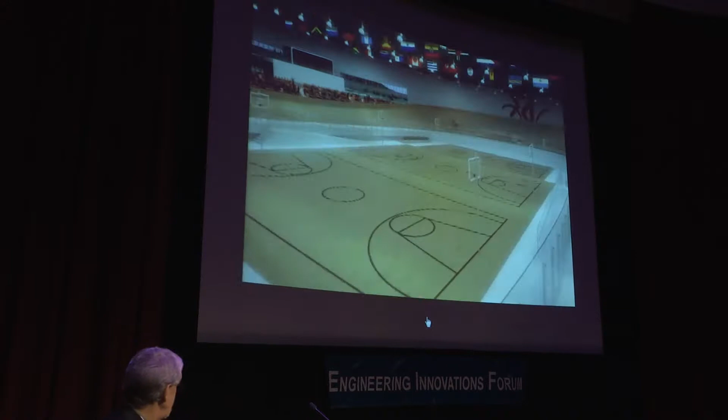We had this vision that maybe they could actually use it for BMX bike events as well. Going to the theme of making sure that the town of Milton has a venue which is truly a legacy venue that they'll be able to use for multiple sports in the future.

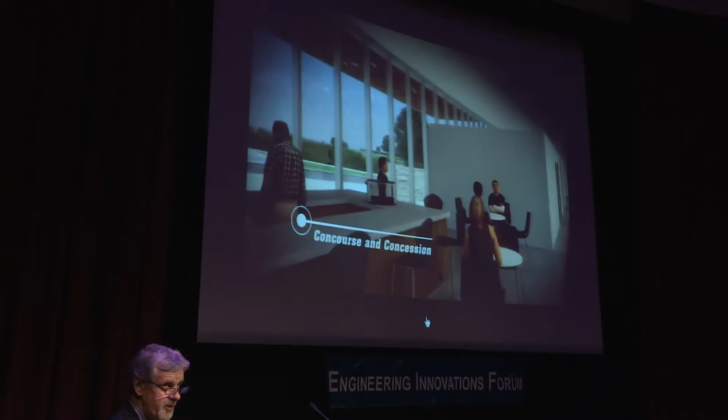The location of the velodrome is on the west side of Milton, which as Signe said, I believe is the fastest growing community in Canada, and development is coming all around this area. But the velodrome at the moment is still out in open fields, and it's got a really cool backdrop to the Niagara Escarpment.

Eventually, I believe the town intends to use this more as an educational centre, so the likes of Laurier University is planning a small campus there, along with other facilities that go more toward the educational approach.

Anyway, I'll try and stop this thing now.

So just moving on, we mentioned before the cycling community is really excited about this. Curt Harnett, most of you remember him as being an Olympic medalist.

Curt and Steve Bauer were the first to actually use this facility while we were still constructing it. We had the track completed, the rest of the building was still in construction. They came in their hard hats, and then we allowed them to run their bikes around the track, not in their hard hats, but in their cycling helmets, because we felt they'd be pretty safe. They were really excited about the fact that this facility is now available within Canada.

I think the difference between Curt and Steve is that Curt has hair, Steve has nothing.

Just some of the sponsors involved. You see the 2015 Town of Milton and Infrastructure Ontario, and others involved in the design and construction of the facility. I have to give out some credits.

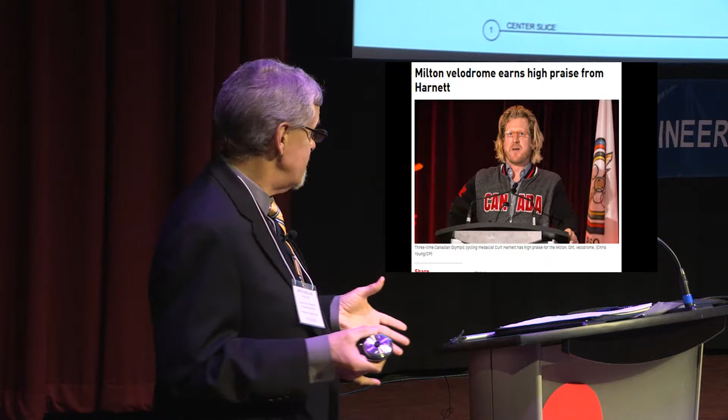So just a few things about the construction itself. You saw in Douglas's presentation some of the long spans over the Aquatic Centre. Similar to the Aquatic Centre, the Velodrome has to have clean sight lines, including for broadcast. So we had to design and construct clear span structural steel, which was obviously the preferred mechanism. These trusses varied in length because it's an oval type facility, but the maximum length was just under 90 metres, so it was a very broad span truss.

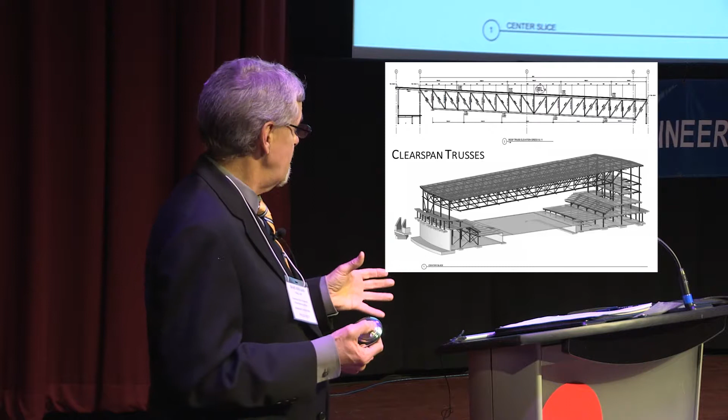The trusses are about 5 metres deep. They were fabricated in 3 sections and then bolted together on site, lifted in one lift with a couple of 100-ton crawlers. When the process of erecting the structural steel was underway, pretty much everything within the confines of the Velodrome area for construction had to be put on hold, since the structural steel took precedence over every other construction activity within the envelope of the Velodrome.

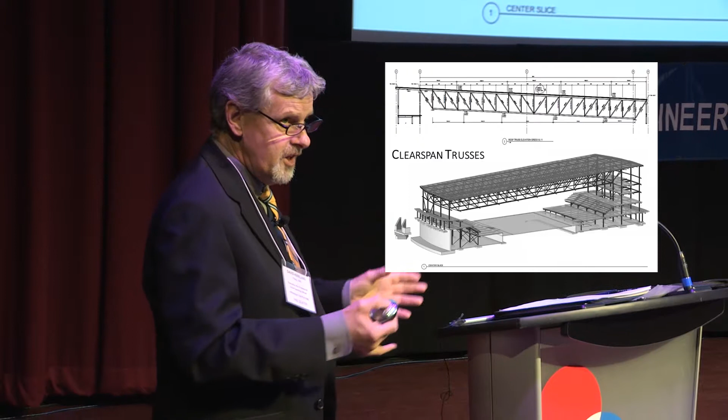Again, just a cross-section. If you're looking at the occupied spaces, the east side is the mechanical and electrical areas. What was interesting about the mechanical systems was that everything was located within the building. Nothing, apart from a couple of condensing units, was actually outside. And similar to the other events, air movement and air control is an essential part of a facility such as this.

In the case of the Velodrome, the temperature range has to be very close to 24 degrees Celsius, and humidity control of about 35%, because you've got a wooden track within the facility and wooden gymnasium floors as well. So temperature control, volume change, everything is very critical.

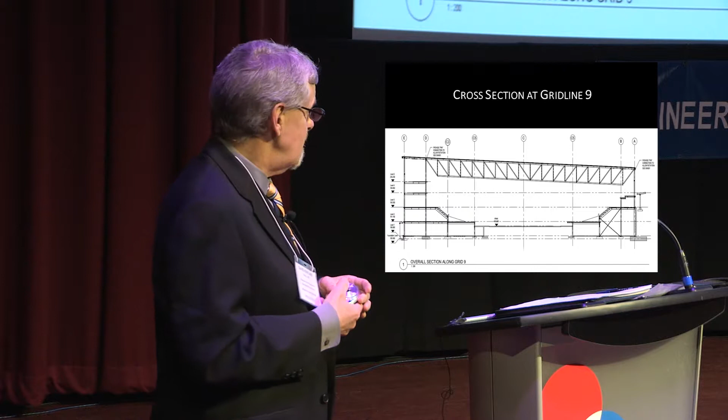On the west side, we had the balance of the services, gymnasium, offices, and then the broadcast level up here, and room for additional seating for the games themselves at the upper levels. The legacy capacity is about 1,500 spectators. For the games, I think we add an extra 1,000 seating capacity.

In the middle of the Velodrome itself, the track is at this level, and again, Douglas was talking about entry level at different levels. So for people attending the games, they'll come in at level 3, looking down onto the track. The cyclists and all the athletes will be down at the lower level, separated from the public entirely.

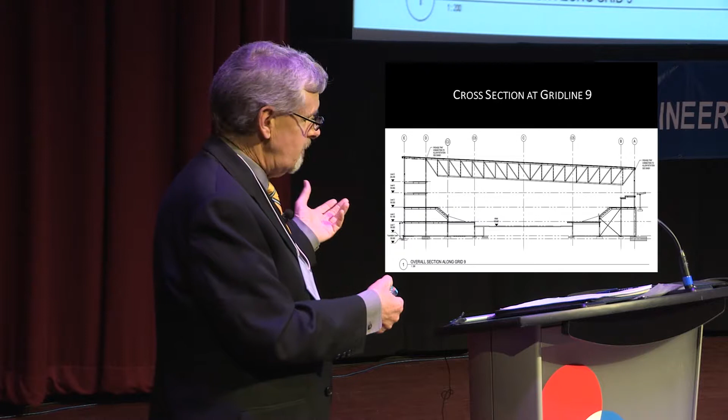So the access is up to the Velodrome level here, and all of this area is actually compacted engineered fill. We couldn't create a void space under the central area of the stadium, under the basketball flooring. It had to be compacted fill, and all of that had to be done after the structure was up.

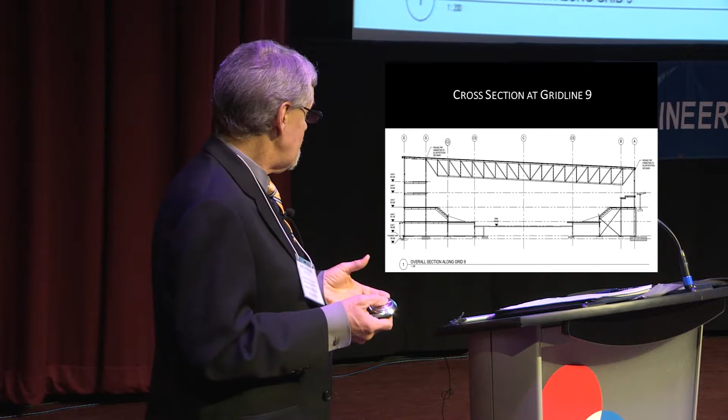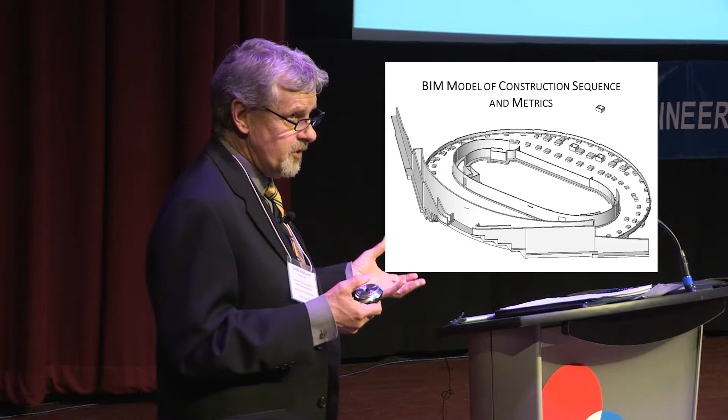Another use we have for ourselves as contractors is building information modeling. Clearly we take documents which are given to us by the consulting industry, hopefully in an electronic format. We can create them in electronic format if we have to, but this job in particular was done on Revit, so it was already done as a 3D model. We then take that information to help us with preparing logistic diagrams, sequence of construction, and looking for clash detection, particularly with the mechanical, electrical, and plumbing systems.

I'm going to run you a short video which will show the outline of what we put together in terms of the model. This video has different components of the model that we use for different aspects of the work. So we start with a clean site.

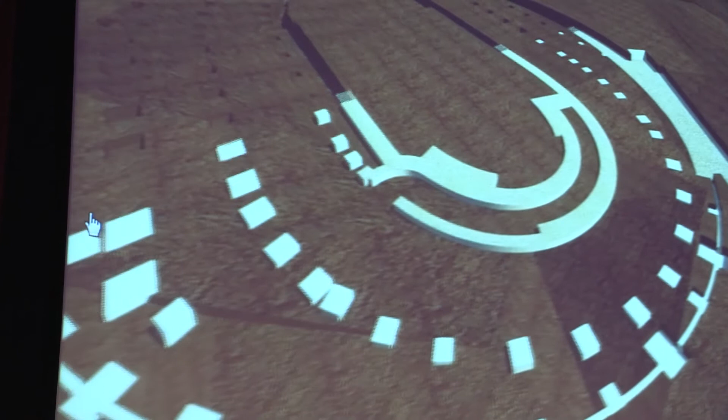All of the foundations are founded on unshrinkable fill. We started with the concrete structure, retaining walls on the east side, strip footings. Everything is strip footings and pad footings. Concrete work and structural steel starts to be erected.

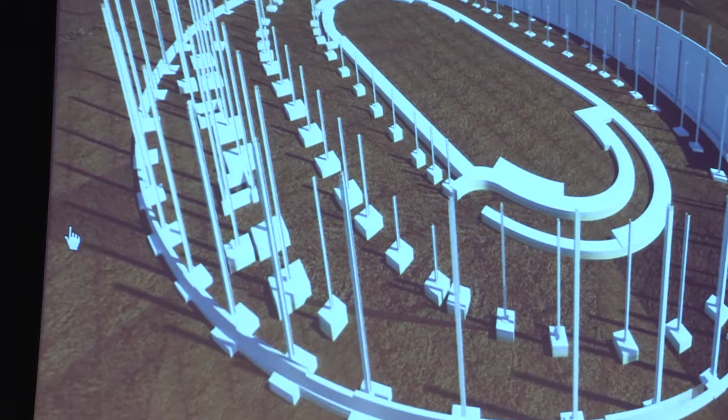Trusses dropped on. Everything looks so easy, I know, but it's not quite that easy. And being a contractor, we don't quite do it in the sequence that we say we're going to do it either. So it didn't necessarily go in exactly the same sequence, but I think you get the picture.

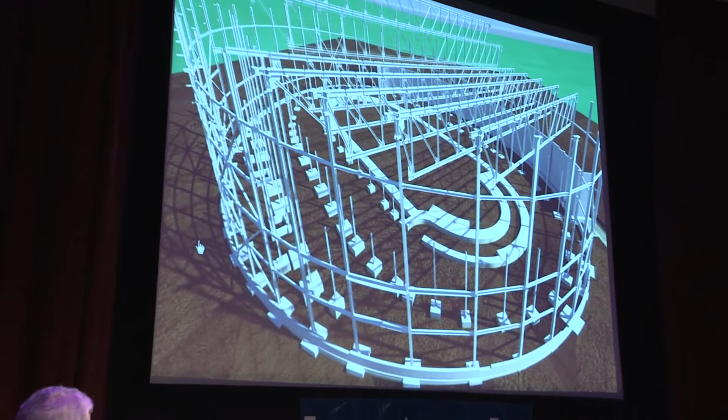But for us, it's very important because we can dimensionalize everything. We can take those drawings and prepare shop drawings. The structural steel shop drawings were all prepared from the Revit models. Very critical because of the dimensioning on the structure itself.

The girts around the perimeter were all radiused. They weren't just straight sections, so with the radius sections we had to determine through the model. On the inside, once the structure was up, then we started work on the infield.

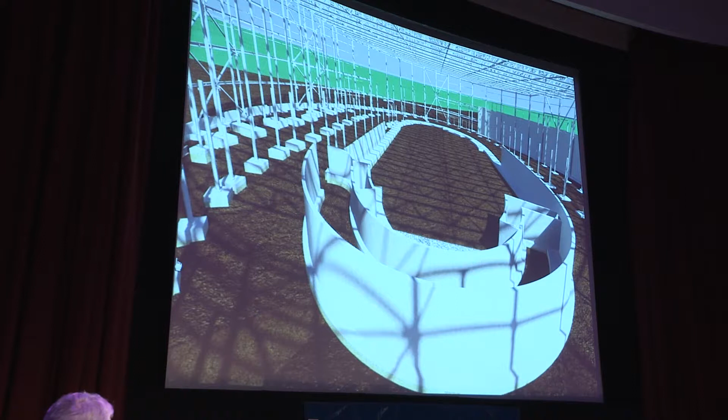So we had the concrete work on the infield. We had the backfilling, as I say, to bring the infield up to grade level. The track itself is built on structural steel beams, steel decking, and concrete decks, so everything is elevated at that section, but the infield is all on grade.

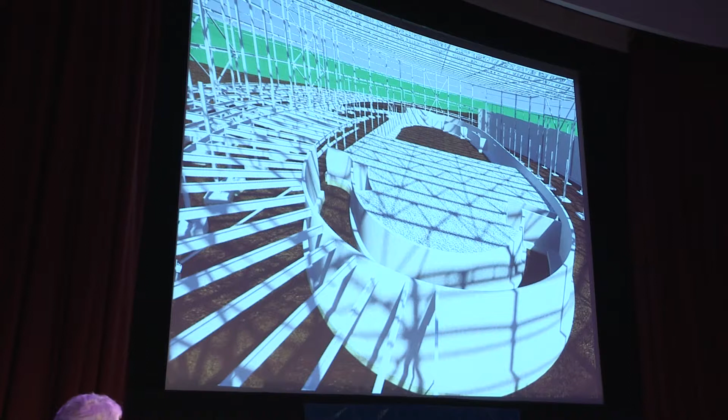You can see the access tunnels, one at either end for the athletes to get out into the center field. We use different components of the model for different reasons on the construction—sometimes for sequencing, sometimes for coordination of different trades.

But pretty much everything on this job was modeled. In fact, not pretty much—everything on the job was modeled.

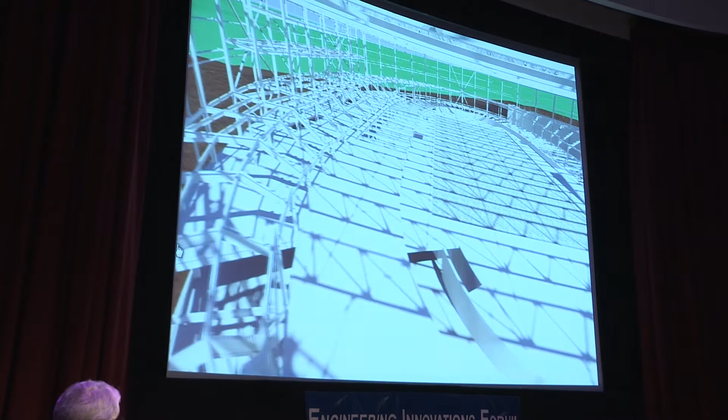You see the track slab going in, and then we start looking at the bleachers, the structure, and all this work was completed after the main structure was installed.

The roof is not shown as being on at the moment, but because you see that nice shadow moving across, that's the roof. In actual fact, the roof was enclosed well before the interior structure was completed.

On the outside, we had extra retaining walls because we had to build the east side of the facility up to the level 3 entranceway. Remember, we need to keep the public away from the athletes, so everyone's entering from this area here. So we had to build additional retaining walls because of the additional surcharge on the main building retaining.

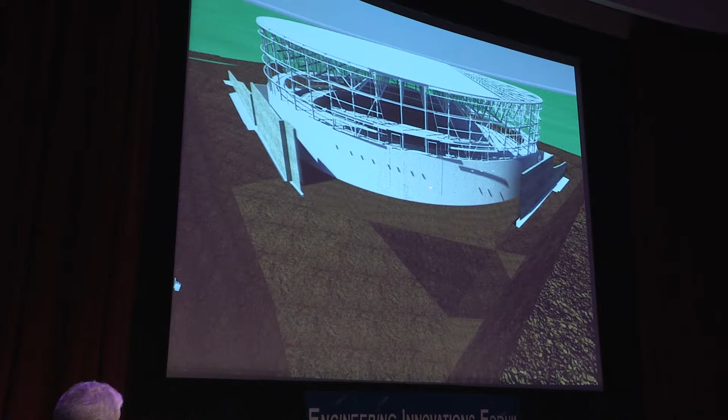And so everything comes up, and that was the structure. So we had a pretty good understanding now of what the structure would look like. Then we had to turn our attention to the MEP systems.

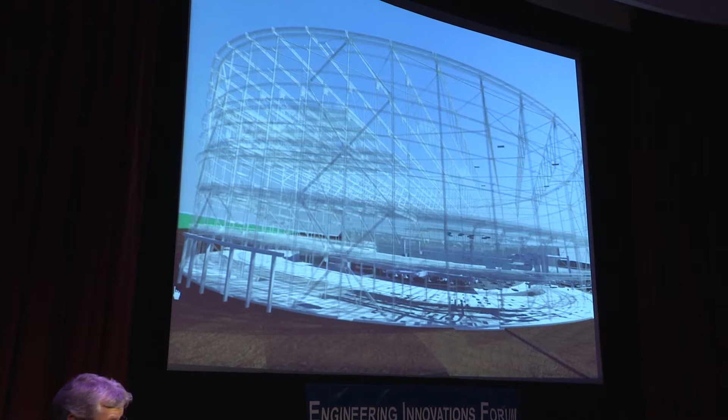Again, there's a lot of air in this building, a lot of ventilation systems. So with our subcontractors, we had to model all of the mechanical, electrical, and sprinkler systems to ensure that we minimize clash detection. Now, I would like to say we didn't have any clash, but that's pretty unrealistic. So we had a little bit of clash. I'd like to say probably 90% of it we avoided.

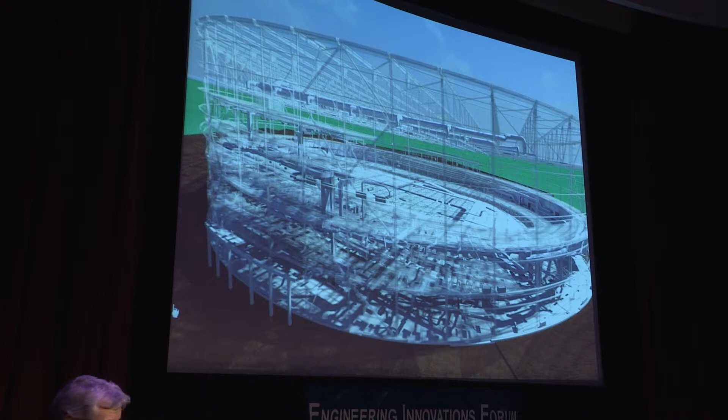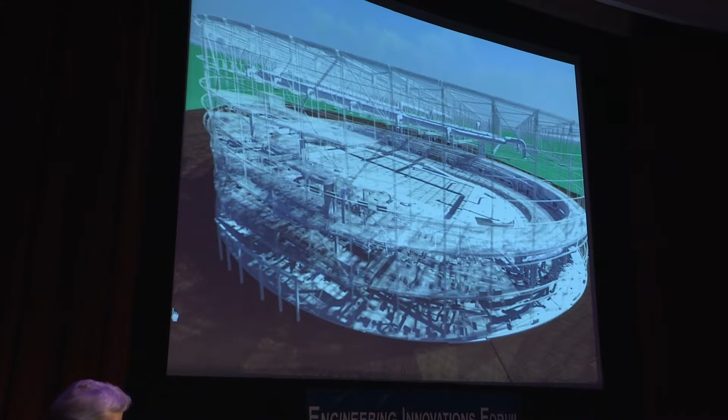But this is an example of what most contractors are doing now, utilizing the technology that the consulting community are already utilizing, but we're using it for our own purposes to really maximize our efficiency in construction, to minimize rework, and also to assist the consulting community in terms of coordination of drawings and different facility fixtures. So you see the mechanical systems going in—again, not necessarily in this sequence, but we know they're all there. And then we turned our attention to the partitioning within the building.

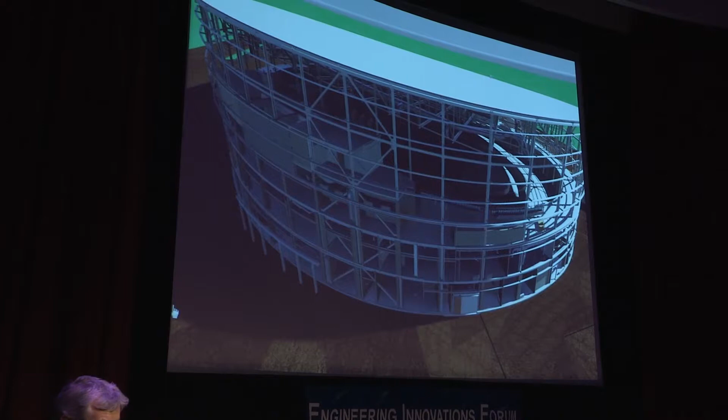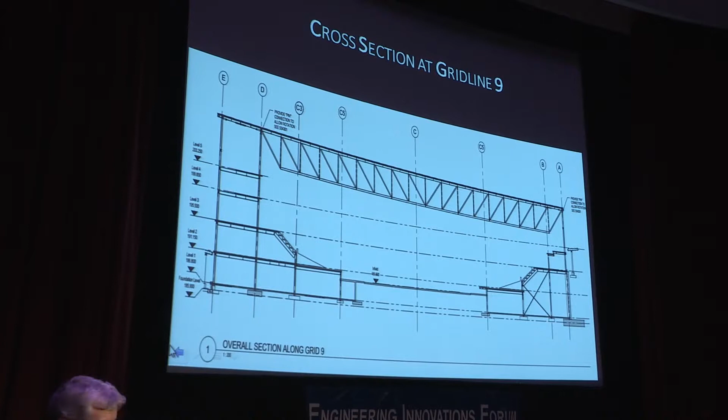We turned our attention to the partitioning because it's part of our clash detection with services, and sometimes different building fabrics clash in the drawing. So you want to make sure you've got drywall where it's supposed to be drywall and not block wall, silly little things like that. And the exterior cladding system, which Douglas already mentioned. Basically, the building structure and the fabric were all modeled so that we, as a contractor working with our designers, could deal with issues before they became construction issues as much as possible.

Just a few shots of the actual building through the construction process. The acoustics are very important in this building, as indeed they are in the aquatic facilities as well.

It's interesting, if you have the opportunity to go into the facility, you'll find it's a very hushed environment, so you can quite easily hear someone quietly talking on the other side. It's kind of an eerie feeling - if there's nobody in the building, it's very eerie. But the intent is to keep the sound noise down so you're not distracting the athletes on the track.

Construction, a few photos of construction. We started in April of 2013, which is the best time to be starting because the ground's nice and wet and soft - there's usually a bit of rain as well, but hey, we're contractors, we're not that smart sometimes.

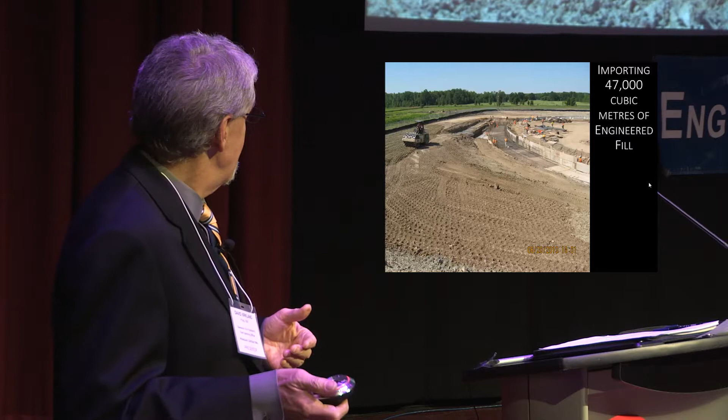Reinforcing steel - pretty interesting, eh? Lots of it, I can tell you that. About 800 tonnes of it, I think. Structural steel, I think it's about 1,800 tonnes of structural steel.

The trusses, as I say, they were big. The photo probably doesn't do it justice, but certainly the installation process was a pretty neat affair to watch. Once they got it down pat, they were erecting a truss every 2 to 3 days, so it was a pretty good process.

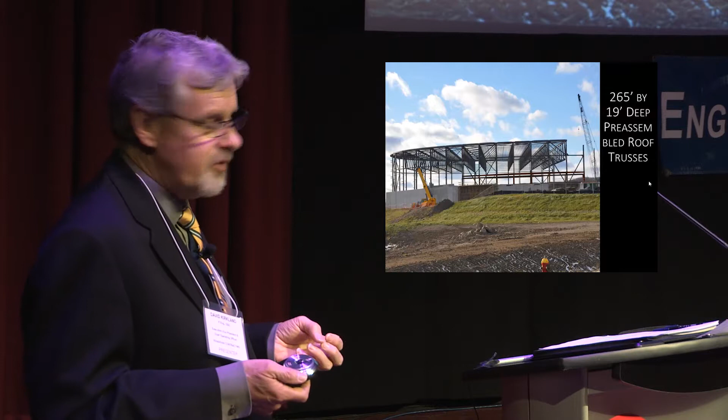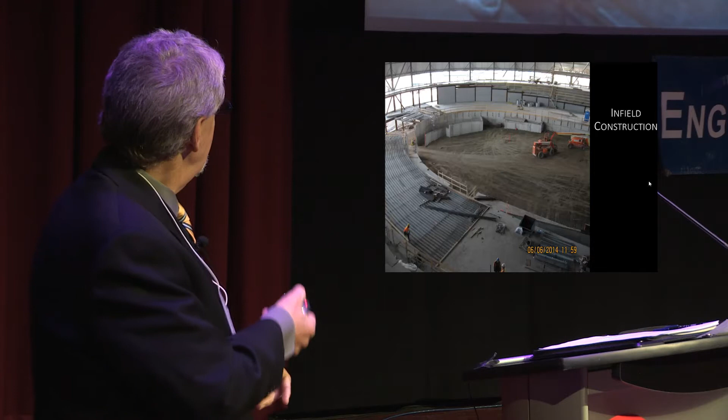Once the building structure was up on the outside and the roof was on, and we started with the exterior cladding, we were able to recommence all the work inside the arena itself.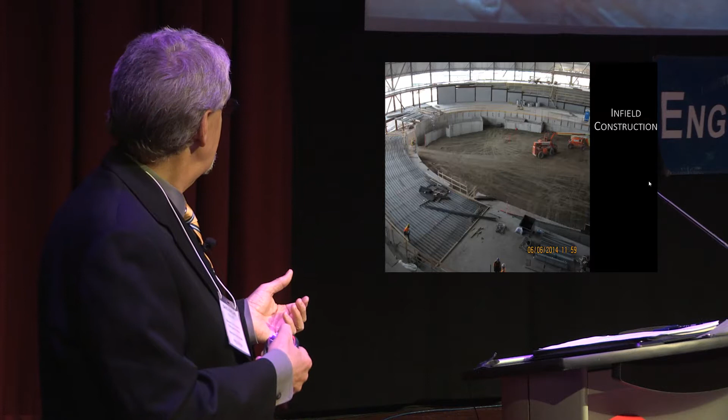It was a very congested site, so we had mechanical and electrical systems being installed in the ceilings, fill coming in to bring it up to grade, concrete walls being constructed, suspended deck ready for the track, and at the same time we were trying to close the building in, all to a pretty aggressive schedule. I wouldn't say everything was seamless in there.

We're contractors, there was a certain number of arguments, but by and large everyone did tend to work together. A plan had to be logical, but it also had to be flexible.

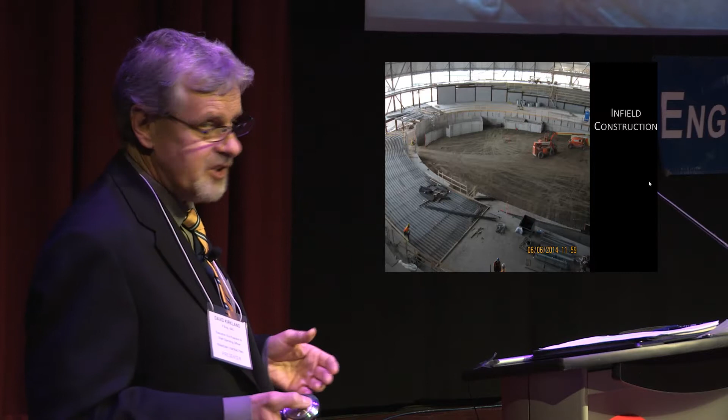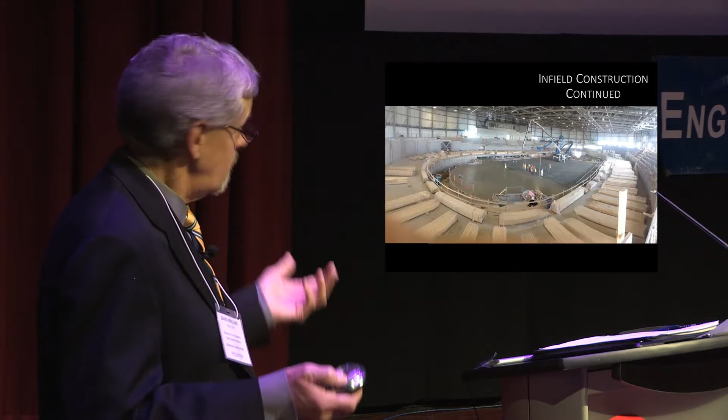Closer to the end, you see we're pouring the slab on grade for the infield, and we brought in the timber now for the actual track itself. I'll talk about the track - actually, I'll talk about it right now. The track itself is probably the most interesting part of the facility.

The wood itself is Siberian spruce, and it was harvested, I think, late in the year 2012. So that was one of the first things we had to do - order the wood. Just as soon as we got the contract, we were on to the supplier for the wood, because it had to be harvested, cured over a period of time, and then pre-cut and pre-assembled in certain sections so they'd have adequate time to be ready for our construction schedule.

The installation, I believe, started in June of 2014. So you see there's a long time period in there. The installers, they're pretty unique, I've got to say - they're German.

I don't know if there's anyone German in the room, but they're very black and white. There's only 3 companies in the world that we're aware of that are actually able to install a velodrome to the tolerances required for the UCI rating. This company, Velotrack, I think, they were very efficient in what they did, but they were very old school as well.

You notice the lead guy here, he's using a handsaw. He didn't believe in electric saws. So fortunately, most of the wood was all pre-cut, but every time he had to do any modifications, it was a handsaw. They also didn't believe in what we Canadians call personal protective equipment. They wanted to wear their running shoes, shorts, and T-shirts.

So we had some challenges. We had to convince them that, okay, at least when you get into the building, you have to wear your personal protective equipment. But we had an arrangement whereby once they're inside their working track, with the Ministry of Labour, we agreed that they could hang their hard hats on a board with their name on it. They could hang their vests on a board, and they could take off their safety boots so they could put their running shoes on, and work within their confined area. But they were not going to work with PPE - it was just not part of their mentality. Anyway, we got along pretty well after we sorted that one out.

The structure itself was quite interesting. It's all wood, sitting on the concrete slab, but there's a subframing of, I think, 2x6s, 2x8s, all pre-cut. The subframing goes in, and it has to go into very tight tolerances, obviously, because it has to meet the UCI rating. This is another use that we found with the CAD modeling - we could make sure our structure was in fact going to be such that the track substructure would fit within the structure within the tolerances required.

So once the substructure was down, then they started putting every single board in place. The boards were typically 30 millimeters by 30 millimeters, individual boards and individually nailed. Somebody told me there was about 1 ton of nails used in the facility putting it down. But it is a very methodical, steady process. They're very precise and very efficient.

In fact, the whole track installation from start to finish just took 8 weeks, which, quite frankly, we weren't sure that would be the case. We thought they were going to need a lot more time. So that was the track through the construction. Really interesting to watch, I must admit.

And then we had the first test event. I think this is an event that was held in early January, but there was a lot of trials and tests before that. Interesting thing about this is called the pace bike, or the pursuit bike. It's actually an electric bike, but it's got the power of a 250 Yamaha - it's a pretty good bike. And to get the certification on the track, this bike had to reach 85 kilometers an hour going around the track, and prove that the track, in fact, was safe.

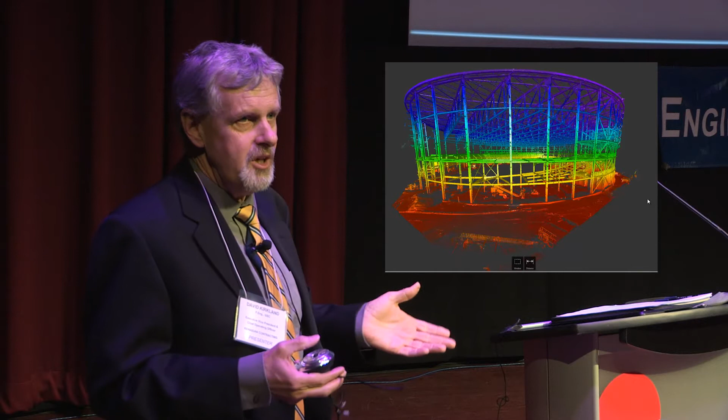In this case, it was also very good to determine where we may have tolerance issues, and yes, we did have some, to give us accurate as-built information of the structural components. It was particularly helpful when installing the girts and determining the sizes required for the insulated panel on the exterior. There were a number of different uses we found for it.

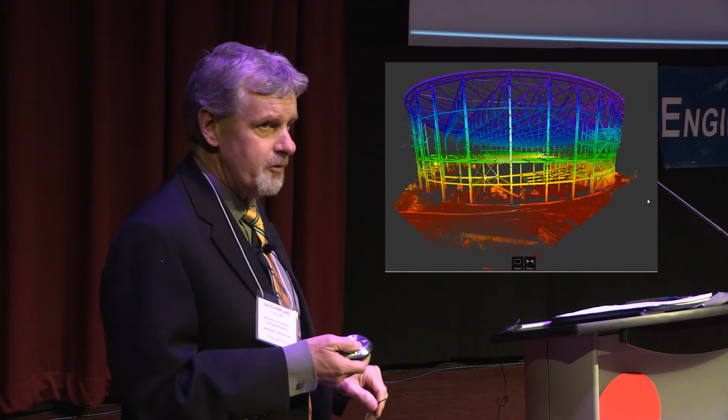We do this ourselves. Two of our field engineers spent a couple of days on site with the scanner. I think they used 15 to 20 setup points around the job to give a complete picture of the structure, and then another 2 or 3 days to input all that information into the Revit model.

I'll just give you a quick rundown through it, but it's probably not that exciting. We're learning more about this technology.

We've used it quite extensively now for surveying existing buildings when you're doing demolition and retrofit, because it gives you a very accurate representation of what's in the existing building.

We use it for shoring projects, excavation and shoring, so that if we have a shoring system, we want to determine exactly the coordinates of it, so we know whether we have any interferences from shoring into the excavation, and how much concrete we may need to pour if we're pouring concrete up against shoring.

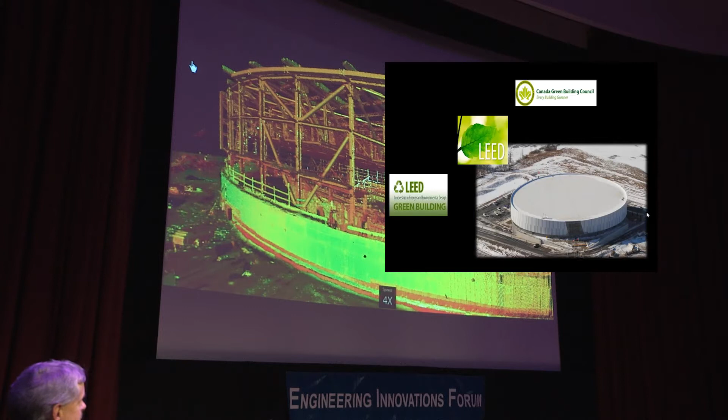So we're finding a multitude of uses, and the more we practice and play with it, the more we'll find that we can use this technology.

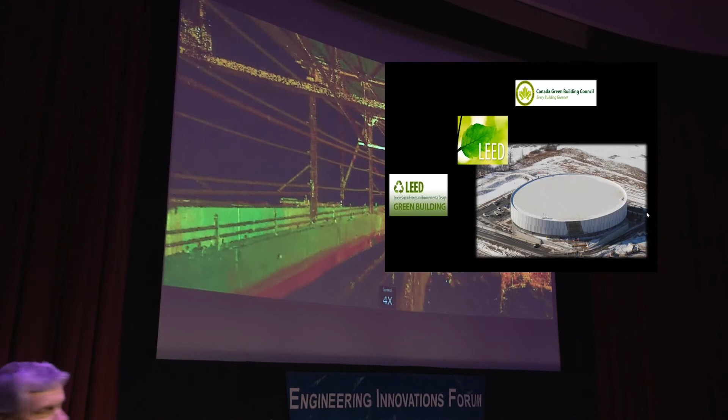Obviously, it's very coarse when you look at it like this, but the information is all embedded in the model, and it picks up everything that moves. You've got excavators there, you've got people there, so whatever's standing in the way at the time of doing the scan, it'll pick it up. That's not to say we're going to put you into our model at the end of the day, but it's very useful for the as-built structural information.

I won't bore you anymore with the technology, but just finally, as Douglas alluded to, all the facilities, I believe, are LEED or designated for LEED Silver, so nothing particularly special about it.

The usual things about stormwater management and control. This building has a uni-slope roof, which is not a LEED requirement, but it's an interesting structural way of controlling the drainage, with a TPO membrane on the roof addressing the heat island effect, I believe.

The hard surfaces around the facility itself are stained asphalt, stained concrete, so that we get more of the heat island effect addressed as well. Usual things inside: LED and compact fluorescent fixtures, low VOC components—all the normal stuff you'd see in a LEED facility.

And then just finally, oh, by the way, if you haven't seen the Rick Mercer clip, you should see it. It's on cbc.ca, and it's really entertaining. I was very impressed with Rick Mercer actually getting a bike and riding around this facility.

Interestingly enough, when the athletes are actually riding, the women will ride up to about 64, 65 kilometers an hour, and the men will get to 68, 69 kilometers an hour. So if you can visualize that around a 250-meter track, that's really flying—pretty scary stuff.

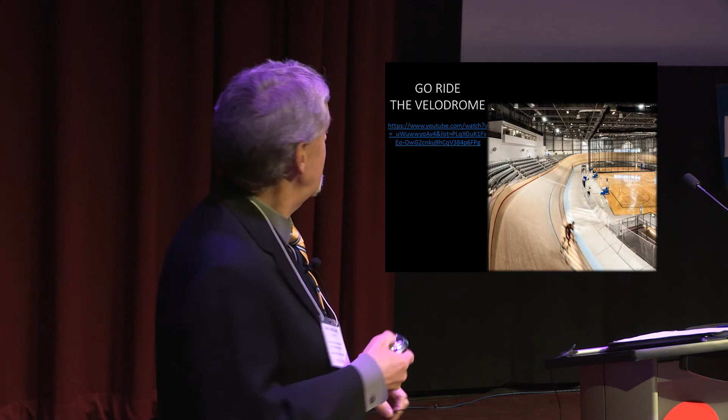I'm not going to show this now because we're probably going to run out of time, but this is just a video. If you wanted to see it on YouTube, it was one of the first rides that Steve Bauer did on the track, with a GoPro head cam, and it's kind of interesting to see how they actually get themselves in position, how they get higher on the banks, and how they get back down lower again.

For the first lap, probably, he's wobbling—it's difficult to get up to speed because you've got no gears. You've got one direct drive, and it's a slow, tedious process to get up to speed. So it's kind of interesting to watch if you're at all interested.

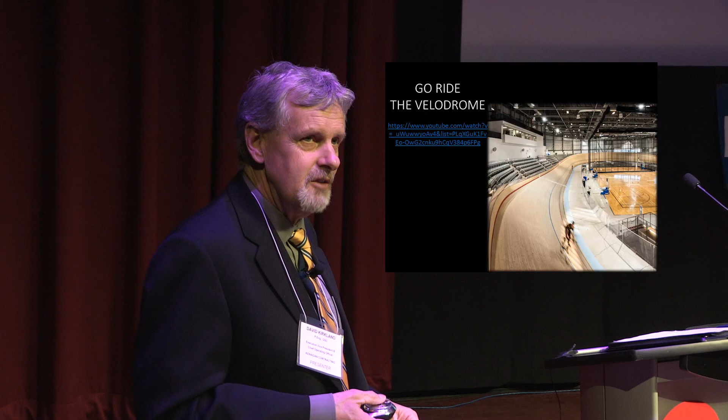And that, I believe, is all that I have. Thank you.